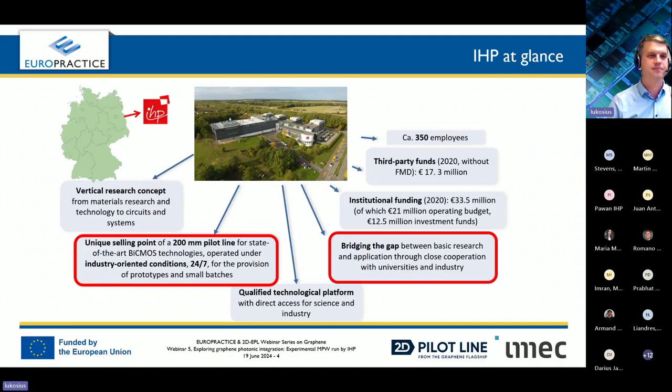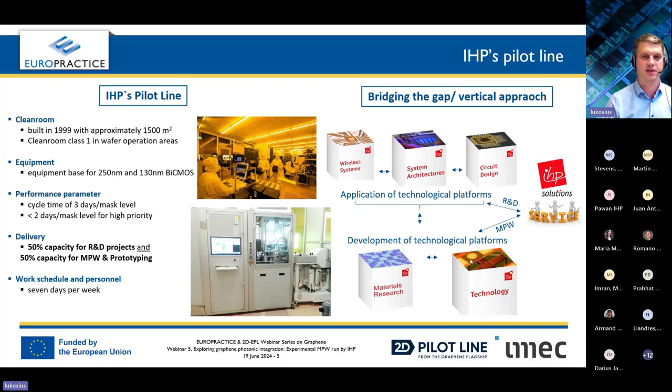To give more details about the clean room, we are around 1,500 square meters, and we are operating 250 and 130 nanometer nodes for the BiCMOS technology. So we are dedicating half of our time to the research and development activities, and half of the time to the MPW and prototyping services. So we have 5 departments. So we have the so-called vertical approach, where we can start from the materials in the very early stage. We can apply them in our technology line, and then building the systems out of that, we can provide certain technologies as services. In this sense, graphene is one of the research topics at IHP, and here is a summary slide of what we do with graphene before I go into further details.

So as I mentioned, 200mm is the message I want to give here. Standard wafers, and we are solving these kind of technical issues with graphene integration. So we have to grow it, transfer, pattern, passivate, and contact. And once it's solved, we can apply these methods to the fabrication of novel graphene devices. So the scope of today's presentation and the scope of what we are doing with graphene is photonics. We believe that graphene photonic devices have the potential. And here's an example shown where the graphene modulator, for example, is put on the back end of line of our electronic driver circuit, which is also fabricated at IHP.

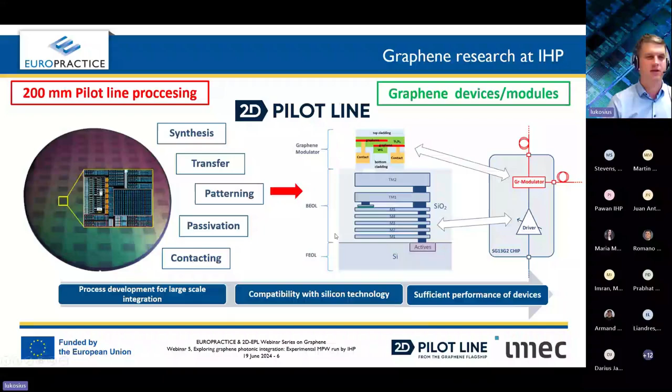So this is basically the core of the 2D pilot line activities, what we are doing as well. So we really want to make process development on a large scale. We want to be compatible with silicon technology, so everything that we do and what I am going to discuss is done in our pilot line, which is a CMOS pilot line. Certainly, we have to improve and we have to make sure that the devices have sufficient performance. So these are the core activities with graphene that we are doing at IHP.

But let me start with a very basic introduction of graphene. So I am not going to explain all the details about graphene, but most probably many of you know that graphene can be applied to different application fields, starting from flexible materials, batteries, heat spreading, as well as microelectronic applications.

At this point, I would like to define that what I'm going to speak about today is a single layer of graphene, as shown in this picture, and it can be grown by CVD. Because I don't want to have a confusion: in the literature, many of the works define graphene also as the example shown in this picture. Yes, it can be something bent, it can be a couple of layers and so on.

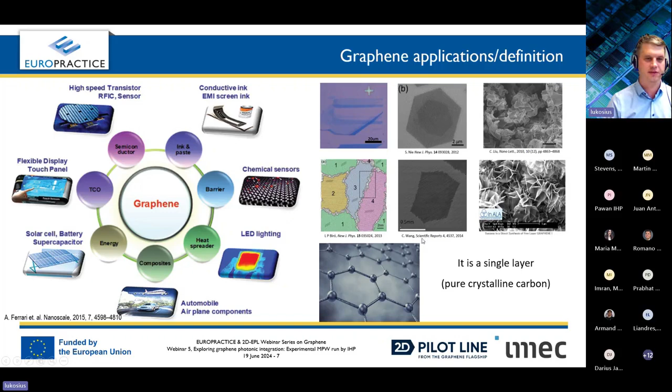Many of these applications do not require high quality single layer graphene, but in photonic applications and in microelectronic applications, single layer graphene is essential. And whenever I refer to graphene in my talk, I am speaking about single layer graphene grown by the CVD technique. So let's start with electronic applications.

Electronic applications are the most advanced ones so far in graphene. Here I just have a couple of examples of what can be done with graphene. For example, Hall sensors can be fabricated where you put 4 contacts on graphene, and then you can apply a magnetic field and, for example, monitor the current in the channel.

On the other hand, the GFET configuration can also be used for biosensing applications. And here an example of a biosensor is shown, which is even integrated with CMOS circuits. This was part of the MPW runs delivered earlier in the project. There were 4 runs which are already closed, and AMO and VTT have delivered and produced GFETs for electronic applications.

And the one that is open now, Romano also briefly mentioned that the webinar took place a couple of weeks ago, and it's still open. So if you are interested in graphene for electronic sensor applications, you can still apply and rewatch the webinar on YouTube. What we are interested in is certainly the photonic application.

Here I collected a very brief introduction to graphene photonics and 2D material photonics applications. On the left side, we can see the range of materials which can be applied for modulator applications. On the right side, we have the applications related to photodetection. We can see a very broad spectral range. These different materials, due to their electronic structure, can be applied at different wavelengths, and various device concepts could be made.

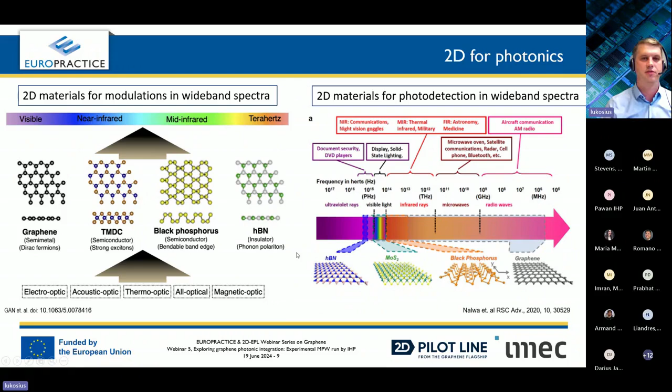Certainly the most important one for us is graphene, and I'm going to talk about this later on. But this shows the potential of 2D materials for applications in the photonics area. Here I selected a couple of examples showing that even first products or first concepts are in the market or close to the market.

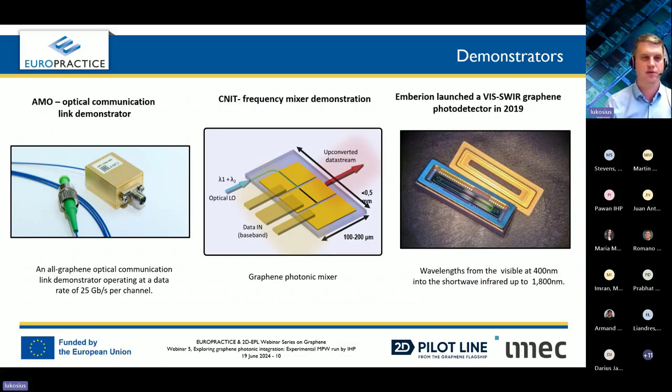For example, AMO demonstrated some years ago an all-graphene optical communication link, where a graphene modulator and photodetector are used. A group in Italy is working on a novel concept of frequency mixing. In 2019, Emberion launched this photodetector, which works at various wavelengths. These are just a couple of examples of products or device ideas realized in the photonics field. Certainly there are many more, but I'm just showing a couple of them in this slide.

The most interesting application field is telecommunications. We all know we want to send and receive data in a fast way, and the amount of data being sent is increasing dramatically over the years. These are certainly not the latest numbers, but we can assume the levels of data being sent are increasing significantly. The key element of these data communication solutions is the so-called optical fiber, or optical link, or radio link, if you want to name it.

There are two key elements in this optical link. On the one side, we have the modulator. On the other, we have the photodiode. These two devices, modulator and photodetector, are the most promising photonic ones, and there are a number of works so far, more on photodetectors than on modulators. This shows the potential of graphene and 2D materials in these two applications.

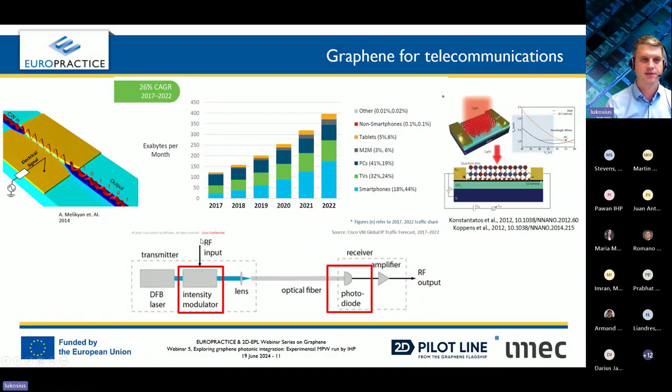And therefore, in this kind of 2D pilot line projects, we are trying to bridge this gap between the fabrication in the lab and fabrication in the real pilot line. But the scope of today's presentation, where we have the most experience doing that, is the graphene modulators. And I would like to give a brief introduction on the graphene modulators.

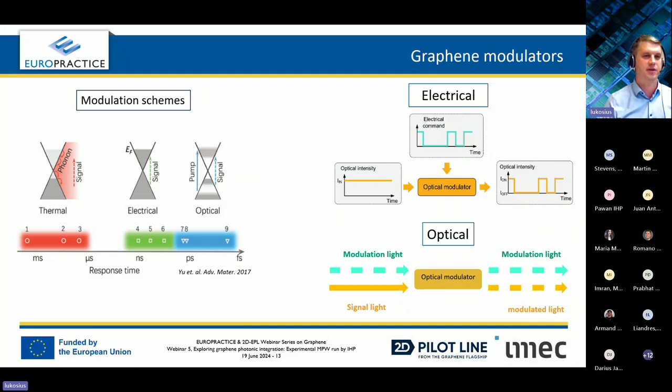Let me explain why graphene is good for that. Let me start with these three pictures, and focus on the middle one. Once again, we are seeing the Dirac cone of the graphene. In the zero voltage state, let's call it like this, the Fermi level or the chemical potential is somewhere in between the valence and conduction bands. So it means graphene can absorb the light.

As long as we shift the chemical potential up or down by applying positive or negative biases, and once this energy is higher or lower than half of the photon energy, we can make the graphene transparent. It means that no light is absorbed anymore in graphene, and therefore we can have a 0 and 1 state, if you want to call this principle working.

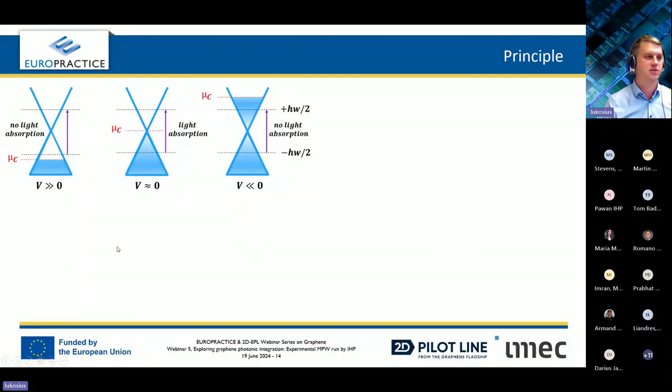In order to understand this phenomenon, we have to go a little bit deeper into the physics. We have to understand the complex refractive index, which has real and imaginary parts. This plot represents how the real and imaginary parts of the refractive index change if we change the chemical potential, which can be changed by applying different voltages to the graphene modulator. If we imagine here a 0 and 1 state, the difference is quite high. So the amplitude can be changed dramatically by changing the refractive index.

For the phase modulation, it's the same. We are modulating the real part, and we see that if the Fermi energy is shifted higher, it can also be modulated in a decent range. Certainly this is valid only for a certain wavelength, and the TE mode in this case is simulated, but this shows the potential of graphene and explains how graphene can be absorbing or transparent. A very important remark is that this change between 0 and 1 state is strongly dependent on the graphene quality.

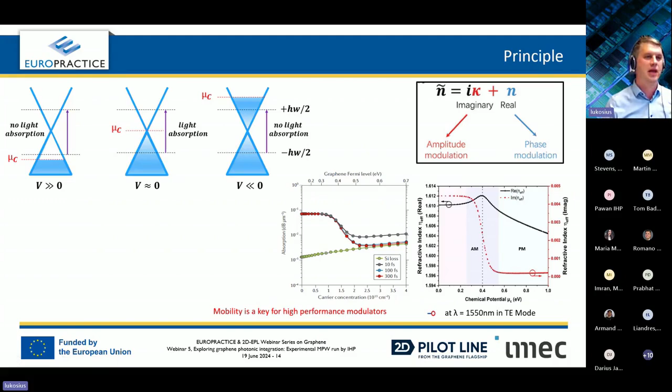Here is a literature report showing how graphene quality changes the modulation depth, or absorption rate. It depends on the graphene quality, shown by the so-called scattering time in graphene. Scattering time means how long the charge carriers can fly without having any collision. The higher the scattering time, the better the performance of the refractive index change. So this is the basis of graphene light interaction, and this effect allows us to create various concepts with graphene modulators.

So to summarize, as I showed a couple of slides before, we have broad optical response. We can change the wavelength from visible to infrared and still have this effect. Graphene, as I just showed, has a strong interaction with light, which means we can reduce the footprint. We can tune the Fermi level or chemical potential by applying gating. Graphene is CMOS compatible, it's just carbon, and ideally we can lower the power consumption.

With this, I would like to introduce what types of modulators exist. So first, let's start with the very simplest approach. We have a single layer of graphene and we have a silicon waveguide. You can see in this illustration, graphene is placed on top of the waveguide.

In this case, green is doped silicon. You are making the capacitor with the doped silicon. You have one contact here and one contact there. So you're building the capacitor between graphene and your doped waveguide. In this case, the process is slightly complicated because you have to work with the doped silicon, and you still have some losses due to the silicon free carriers in the waveguide material.

There was a concept proposed a couple of years ago, so-called dual layer graphene. So instead of using one graphene layer, we can put two graphene layers, which are separated by the spacer layer, which is nothing else than a dielectric in between.

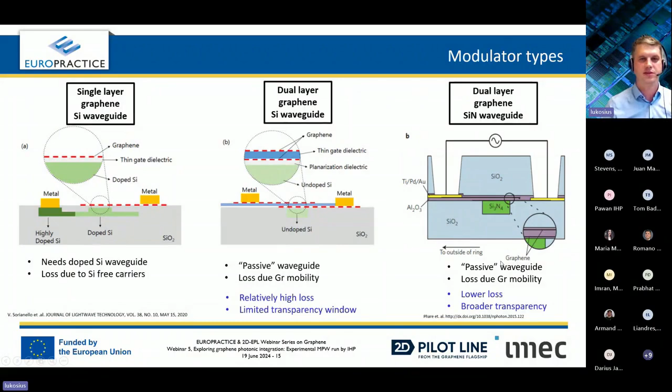So I explained a little bit of the theory, why and how graphene is good for modulators. I want to give you some of the aspects, some of the insights, what is important to understand if we want to do the fabrication and further do measurements. So simulations are certainly playing a big role because we have not only biases and voltages, we also have to deal with the propagation of the optical modes.

So I just have here two examples to be shown. There are many more things to be considered, but here's an example of the silicon waveguide. So now it's a cross section. You can imagine a silicon waveguide and graphene on top. And in this case, we have silicon nitride, just to compare with the previous slide. So you can see immediately that there is something different in both cases.

Silicon, for example, has a higher refractive index. Therefore, the mode is confined much more into the waveguide. As we want to have high interaction with graphene, we want to spread the evanescent field out of the waveguide, so that the light-graphene interaction gets higher. So in this case, with silicon nitride, we can do much more and have higher optical mode interaction with graphene. So it's only one thing you have to consider before doing your devices.

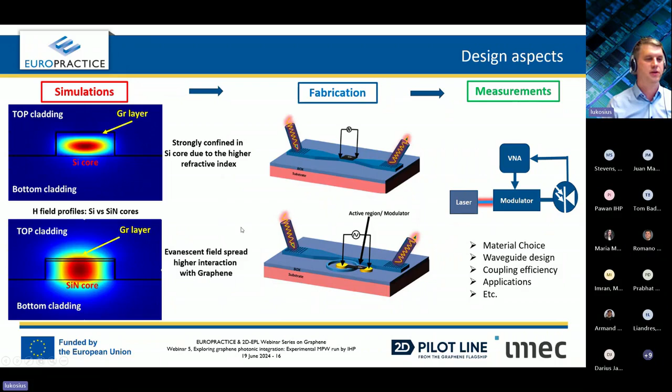So I wanted just to mention that you have to be very careful in choosing the materials. Waveguide design has to be adapted, and people have to understand the coupling efficiency. It's very important the way the light is being coupled in the so-called grating coupler. More information I'm going to show, which type of applications you are interested in, and many other considerations in the designing of your graphene photonic devices.

So let's start with a couple of examples which play a role and what should be considered in making the graphene modulator. So first of all, as I mentioned, we need to couple the light in. So this is a top view now of the modulator, a simplified version. You have the so-called grating coupler, and this is a cross-section of this grating coupler.

You have to couple the light in somehow, so you must understand the details of the coupling efficiency and so on. You have to adjust the process flows for etching, for example, these tubes down. You have to understand the pitch and many other parameters. So I want to show a small illustration here of how the simulations could be done.

And basically we are shining the light with a specific angle, 14 degrees in this case, for the specific wavelength. In this case it is the C-band, and we can see the way the light traveled through the grating coupler and now is propagating through the waveguide to the active area of the modulation. So a very important aspect is to design your grating couplers in a way that they work in a specific wavelength and have the specific coupling properties.

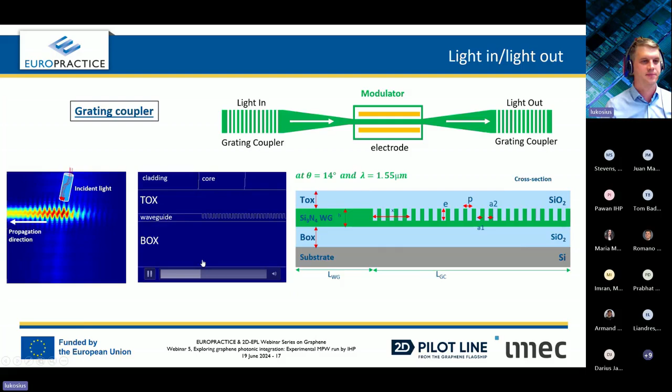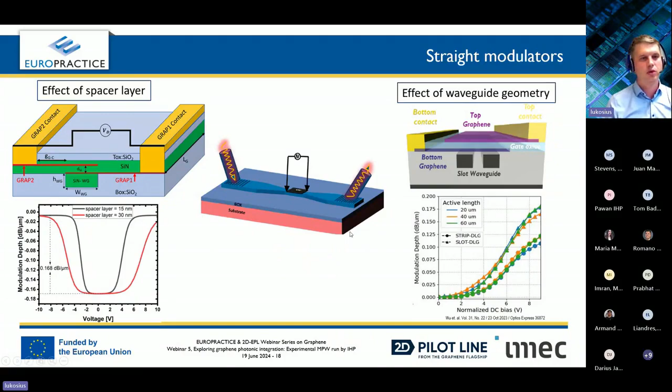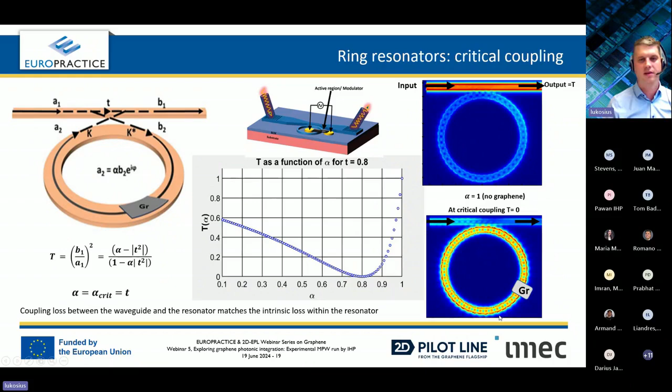I just want to illustrate it once again with the simulation picture, light in, light out. If we have no graphene, we are in critical coupling condition. We are basically sending the light in, and it's being coupled into the ring, but still the total output is then defined by the bus waveguide. So in this case, if we put graphene, it's just an illustration, we can see that graphene is absorbing and much less light is being sent through the bus waveguide. So we can actually modulate the light by adding graphene to the ring.

It's also very important to understand this critical coupling, because it's also changing another parameter, which is called extinction ratio, and is defined by the minimum and maximum position of your transmission dip. So if we don't have any graphene, we can design our ring resonator in such a way that it's in a critical coupling condition. And once we put graphene, it is starting to absorb, so we are reducing the extinction ratio. As long as we are biasing graphene, which is shown in this example as well, we can go back to the critical coupling conditions because graphene is becoming transparent in this case.

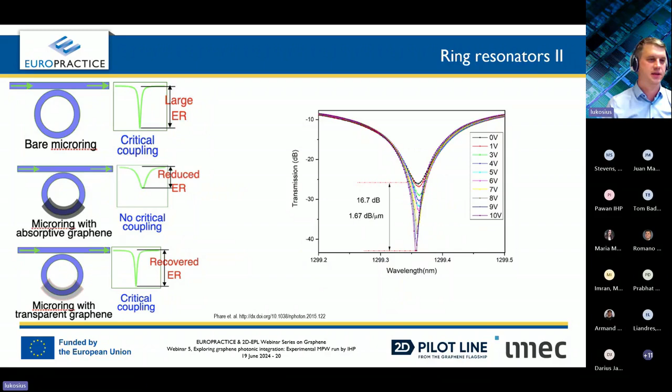So you can see here the experimental result, how applied voltage to the graphene modulator is changing basically the modulation depth, or the transmission, in other words. As I showed you two slides before, with the straight modulators we are at around 0.2 dB. It's just a number for reference, and in this case, we can significantly increase the modulation depth. Certainly, there are further parameters which have to be discussed, but the importance of the ring resonators is demonstrated with these couple of illustrations.

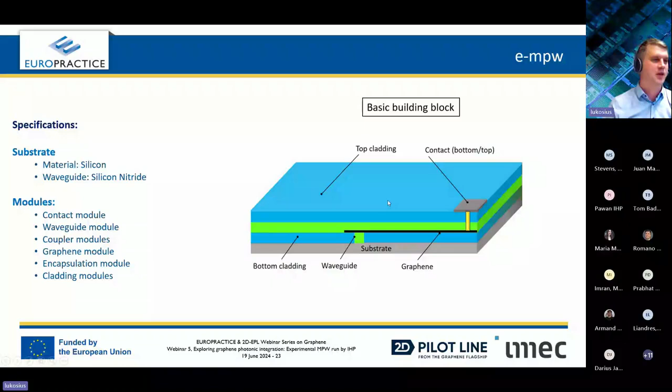So we have the standard silicon substrate, we have the bottom cladding layer, and we have silicon nitride as a waveguide material. We put one layer or two layers of graphene, and then we can realize contact to both graphene layers, which is then covered by the top cladding silicon oxide. So here are more specific device architectures that we could think of. Certainly it does not mean that we can do them all in one run, or that it's possible at all to do many of these concepts, but let me group them a little bit.

If we speak about optical modulation with another light source, so you don't need the contacts, you can have so-called passive graphene modulators, where the waveguide is formed and you have a graphene layer on top, covered with the passivation layer and the top cladding. There will also be an option to have metal heaters if you want to induce any heating effects in your devices. In this middle picture, we demonstrate that graphene can be put on the waveguide; if there are device concepts that require contacting one graphene layer, we could do graphene contacting from the top.

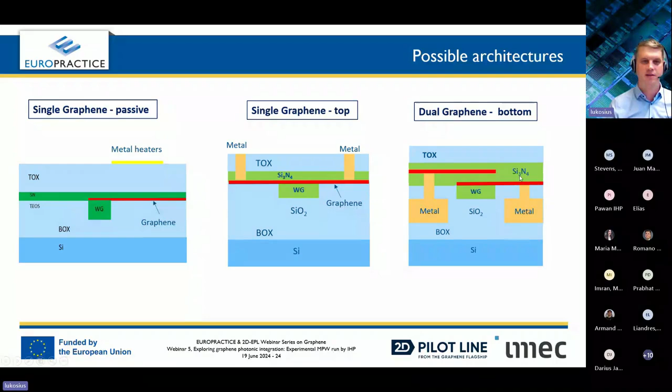The most advanced one and the most complicated at the same time is this so-called dual layer graphene, which I showed a couple of slides previously. It will be done with bottom contacting, and I will show in the next slide a little bit more detail about that. So two graphene layers separated by the spacer, and the contacts are done from the bottom. I would like to give some details about the flow. It's listed step by step here, and I will try to show the illustrations of the fabrication steps.

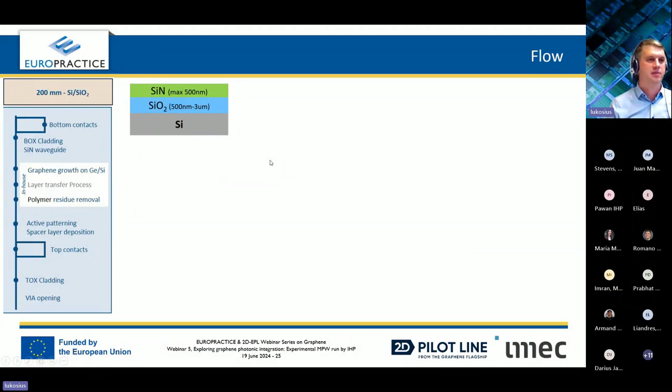So as I mentioned, we are starting with standard silicon wafers, and we can put a bottom cladding of silicon oxide in the range of 500 nanometers to 3 micrometers. So if your design requires 1.2 or 1.6 micrometers, it's realizable. The silicon nitride waveguide material is limited to a maximum of 500 nanometers. Our most experienced and most advanced state is 400 nanometers. You could keep it in mind if you are interested in the experience and the properties that we already have.

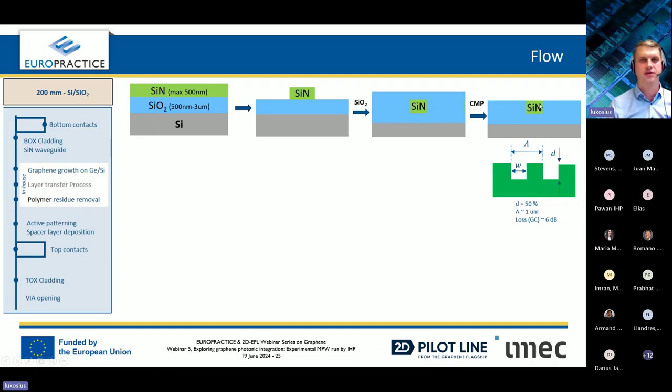Then we put another silicon oxide layer on top of this waveguide material, and we do so-called chemical mechanical polishing, where the silicon nitride is embedded and the silicon oxide and silicon nitride in combination have a flat surface.

As we did that, you see that we are using graphene grown on germanium process. I'm not going into details here. So we are transferring the first graphene layer, which is done also in-house. And just as a reference, you could take away these values. We have the sheet resistance of around 1.5 kilo ohms per square, and our mobility is around 1000 after transferring the graphene. So first graphene is done.

We are patterning it in the dimensions and the shapes you would like. And then we are putting the spacer layer and do the same step with the second graphene layer, which is followed by another passivation layer. We, of course, have to cover everything with a top cladding layer, and the top cladding layer is, again, we could realize some structures within the range of 500 to 3 micrometers of silicon oxide.

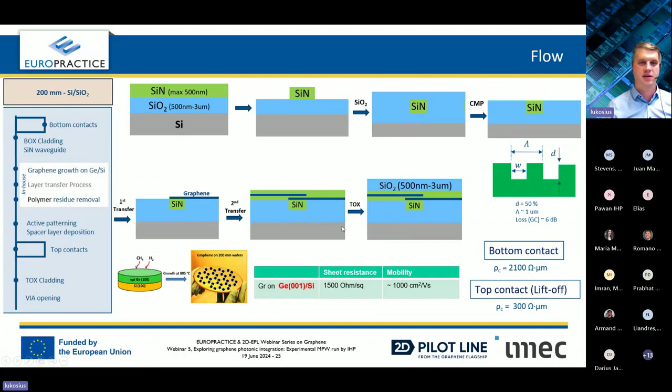As for the contacts, as I mentioned, we have different approaches depending on the designs and on the needs. If we do the bottom contacting approach, we are around 2.1 kilo ohm micrometer, and if we are using the top contact approach for single layer graphene, we could go as low as 300 ohms micrometer. So these are just key values to take away in case any designs are being done.

In the very last few slides, I would like to show the details of the PDK. PDK stands for the Process Design Kit. And as I mentioned in the very first slide, at IHP, we are offering more advanced and more qualified technologies, and they all have the PDK and so on. So we try to do with the graphene the very basic first steps in order to help the designers to fully understand our process capabilities.

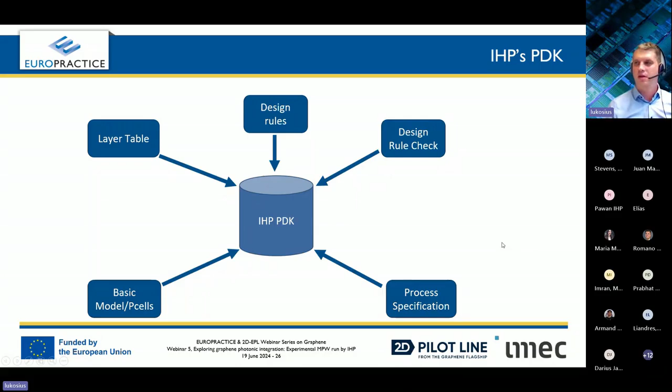So we have layer table, we have DRC check, and we have the first P-cells and scripts for the filler generation, for example. So let me give you a very few details. I don't want to bother you with many of the technical stuff. So in case of interest, we will provide the initial document with the layout rules. Each layer that will be used in this experimental run is listed and will be provided to you. So you have to use the layer table as in the standard technologies, what you might know. And the design rules are also given with the minimum spacings and so on.

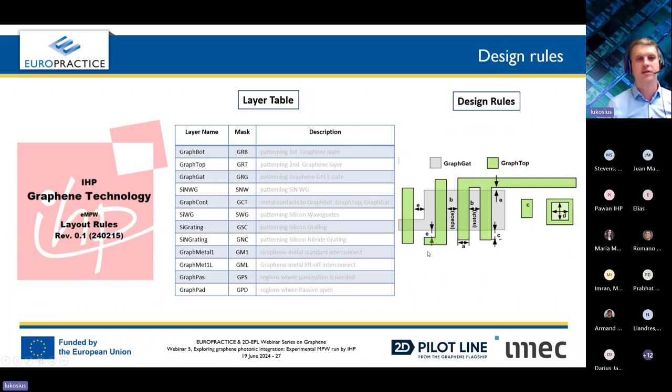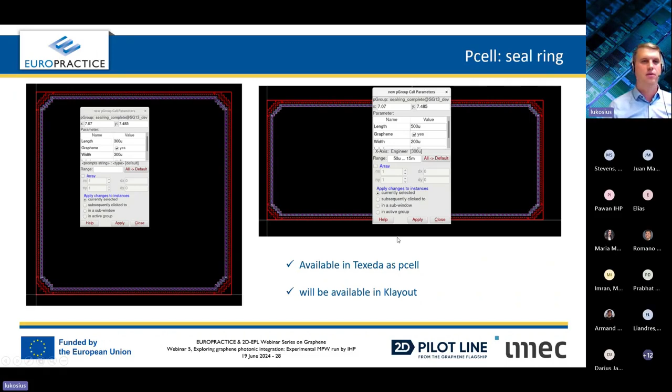What you would have to do is to draw the seal ring, meaning that you have to frame and put all of your designs inside this frame. And this is available in Texeda as a P-cell. And we are working now to provide this IHP graphene PDK in KLayout as soon as possible. So once you draw this seal ring, you are free to draw your structures.

I will certainly provide more details in case of interest, but this is just the basic information what we are offering or what we so far have developed for this experimental run.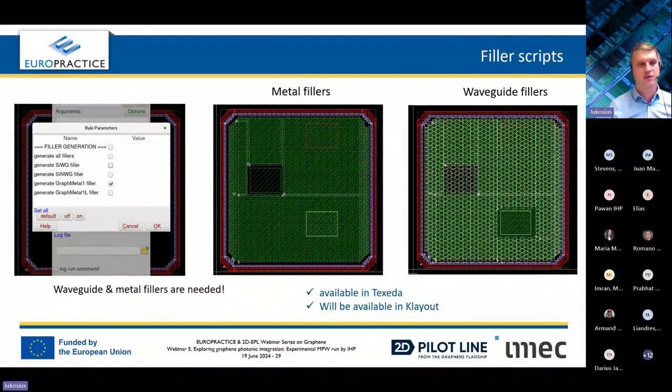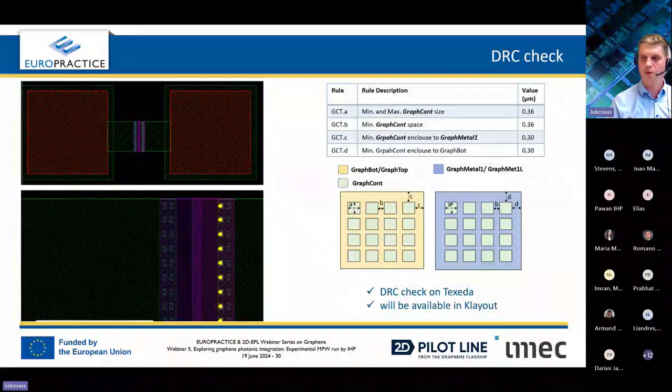Okay, so with this, I'm coming to my last slide with some details. If you are interested, feel free to contact us. There is also on the 2D EPL or Graphene Flagship website the link. You can directly write to us, and we hope that Europractice access will also be organized soon. And the date to remember is the 14th of October. So you have time until the 14th of October, which is the hard deadline. I encourage, if of any interest, to contact us as soon as possible to discuss all the details. You have to sign an NDA, and we certainly have to understand your needs, and we have to see if we can realize your exact designs.